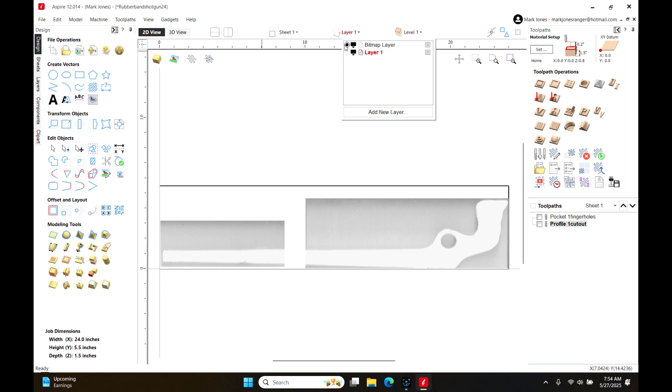After that, I went around it with a freehand vector drawing tool, drawing a rough estimate of the handle, which came out pretty good. Then I used this tool right here to fit all the curves to the selected vectors, made it smooth, which created quite a few things, and this is what I came up with.

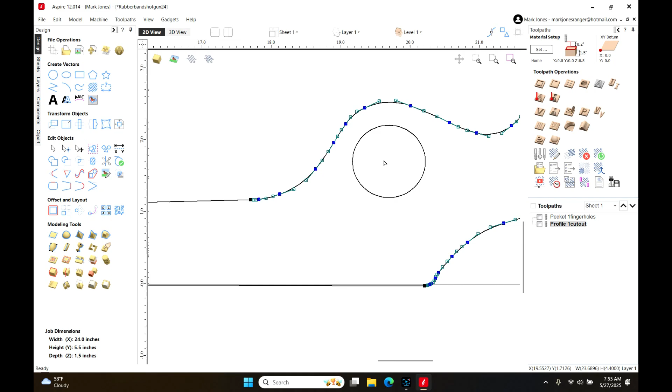It's nice smooth vectors. Let's look at it under node mode, I'll press N to look at the different nodes. Wow, this thing put a whole bunch more nodes in there, extra ones just because it's drawn up, but it turned it into Beziers and cleaned it up.

It did a real nice job of the finish work cutting it out. I didn't really care about this edge here where it came into play, and I had a little trouble with these breaking out. Of course, the hole is a pocket hole, and that's pretty much straightforward.

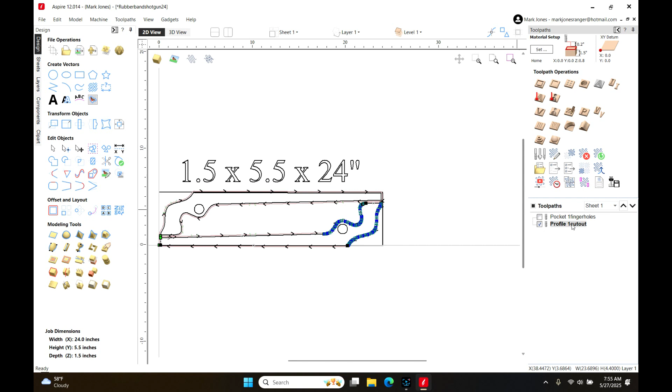On this particular deal, I used a 1/4 inch end mill. My stock is 1.5 inches wide, so I'm cutting down into the table about 1/8 of an inch, not quite. My end mill was 1/4 inch, doing a 1/4 inch step over at 60 inches per minute, or 50 inches per minute, so I'm cutting that in like 7 passes, then going outside this, cutting it off.

On my tabs, I added a couple more tabs. I had this thing kind of breaking free on me a couple times, and I made 10 of them. Well, I wanted to make 12, but I ended up with 10, because I didn't have enough tabs holding this thing together, and this would get to floating around and knock the bit out because it would kick. So I added a couple more tabs to the mix, and decided to put a couple screws in the center here, which fixed that up.

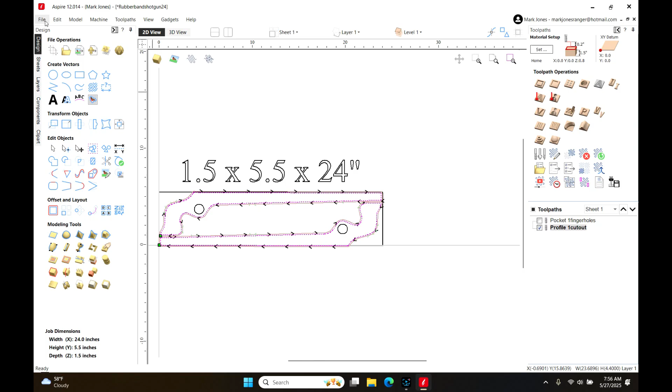Anyway, that was that part of it. I also made one that was just a little bit smaller in size. We'll click close on that one, I'm not going to save any changes to it.

Now we're going to go to the 20-inch gun. This one is 20 inch, the other one's 24, because I had a remnant of the 2x6. It's so nice, you can just sit there and scale the thing and get done, but it's basically set for the same settings as the other file. Anyway, that is the setup with Aspire.

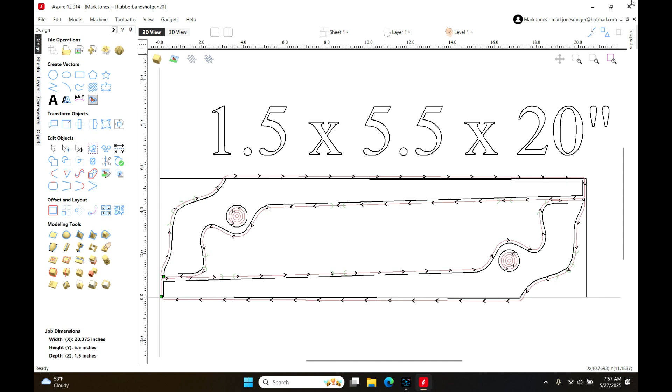Well, we got something going together here, and I'm working on the process. There's a bunch more to do. I basically modified this a little bit, and I'm going to modify it just a little bit more. I need to put a stop out here where the handle comes into play. But basically...

It's going here with the deal up, and you make sure those are fitting. Then you take one of these guys over here and put them in the slot right here. I had this all the way through, where you can slip it in, but there was just too much friction there for me to be too good with. So anyway, that little wedge in there keeps them nice and tight for alignment. Then I'll take my drill and drill it up through there, and run a couple screws up through there. Then when I'm done with that, we'll router them all and put a nice edge around them.

Alright, the way this works is you just put that little guy right in there. He fits in there nice and tight. You put this other little guy over the top of this, and this is your drilling guide. Your drills fit in there, they all line up, and you take your drill bit, hit your pilot holes, and you ring this in there.

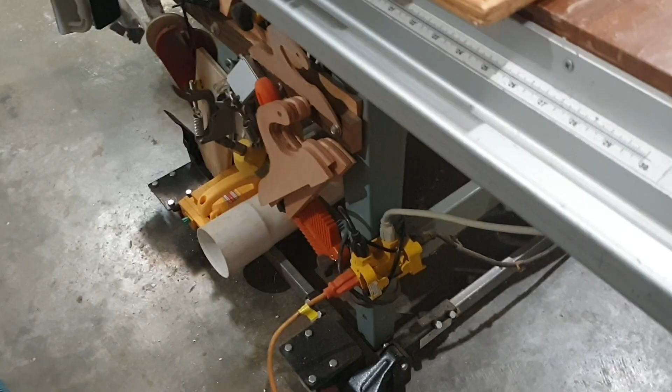and I'm going to run them over the router and clean them up. Being a small shop, I just dangle a cord over there on a hook, and then I pull it out there and I hit the individual machines. That's a dedicated circuit. The cord's just a little bit light, but it does pretty good. One time it really gets a little warm if I'm running that sander on it for a long time, but for the biggest part, everything pretty well runs on it.

But this is a router box that I've got in here. This lifts out of here like that. Of course, this is the switch that turns it off and on, and the shop vac is turned on by that right there, and it runs through this hose, takes it all over there to the dust deputy into the hose. So helps out to clean up some of that, keep the dust out of the air. And of course, up there at the top, I got a box up there filtering the air.

You can see it blowing. It comes on when I turn the lights on in the shop. Looks like I need to clean the filter a little bit. Anyway, 36 of them, I need to route them over. Alrighty, looks like 4 more left to route. And they're cleaning up pretty good. A whole lot better to hold on to than the old square edged. Square edged, carrying that for a while, it would definitely be giving you a splinter or a cut hand.